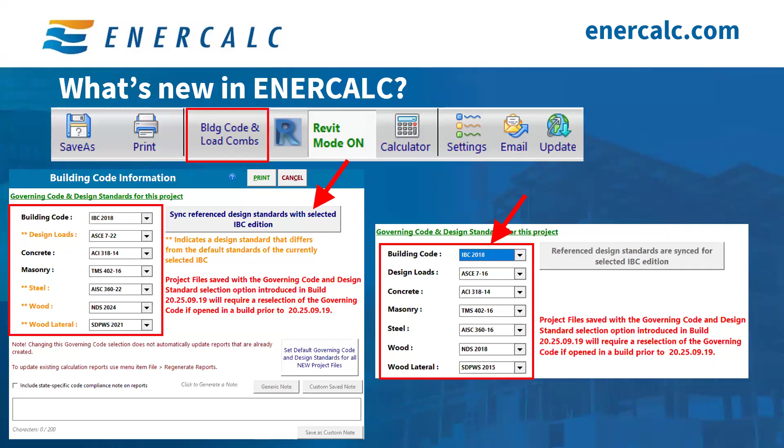When you click on it, it'll change all of these other ones back to whatever that particular IBC references. You can notice here that this is highlighted in a different color, a light orange yellowish color. Anything in this highlighted color is not referenced in that design standard, meaning there's a mix and match going on. But if you click on this button to sync everything with the IBC that you're selecting, everything will be shown in black, meaning everything is indeed within what the IBC edition references.

Keep in mind all of the code changes that we just talked about will only apply to the calculations within this ENERCALC file. If you want to apply this code selection, mix and match or not, as a default for all of your future projects, you will need to click on this button right here, which says Set Default Governing Code and Design Standards for all new project files. When you click on this button, you will get this window, and it will show you what the old defaults were and what the new defaults look like. It will also highlight the changes.

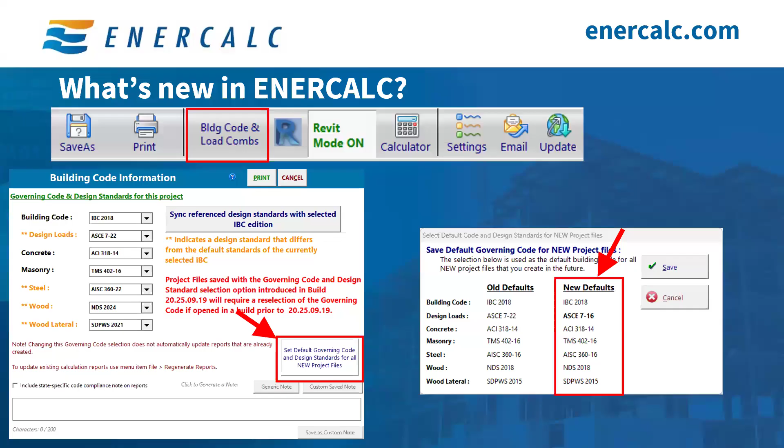So for example, I had ASCE 7-22 here that's out of sync. Everything else is the same standard as referenced in the IBC 2018, for example. And now I just want to switch that from 7-22 to 7-16. So it says, hey, this is your old stuff, this is your new stuff, is this what you want? And of course, you say save, and this will now be the default code selection for all of your future projects.

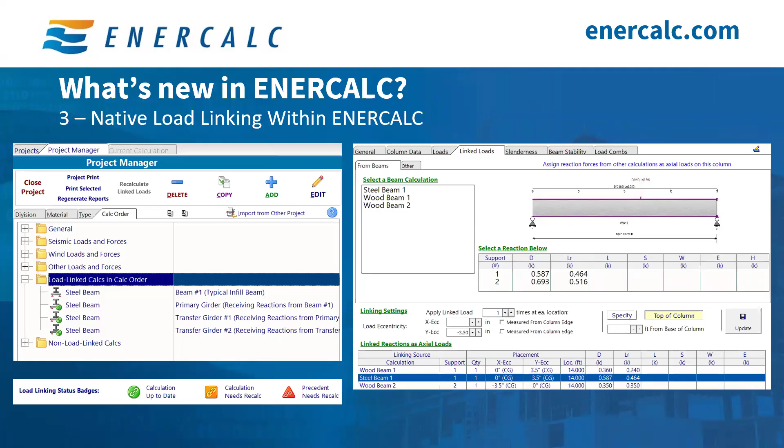Before I get into that, for anyone who'd like to learn more about load linking, we created a playlist of short videos on YouTube to walk you through how to use it step by step, so you can start leveraging this tool in your daily workflow. We also added a new video to the YouTube load linking playlist a few months ago with a full practical example of how to use load linking in real-life design, transferring reactions from beams to columns. This example covers wood beams, wood columns, steel beams, steel columns, and the interchange between them—for example, going from a wood beam to a steel column, or a steel beam to a wood column, and so forth.

Overall, load linking is a powerful tool that allows engineers to create a well-connected chain of calculations while minimizing the risk of transcription errors.

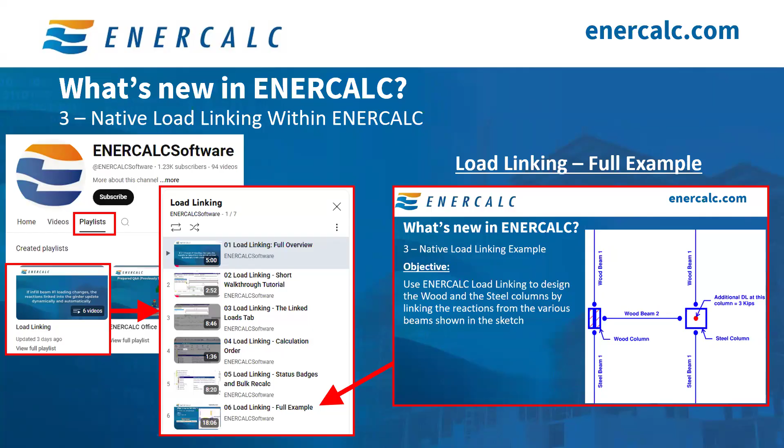Now, with today's new release, fresh from this morning, this new build has load linking that supports the general footing module. You can now link reactions from columns and apply them directly to whatever footing you're designing. This link will transfer axial loads, lateral loads in both directions, as well as moments in both directions seamlessly, so you never have to go through the manual process of transcribing reactions ever again. That's just a quick overview of it.

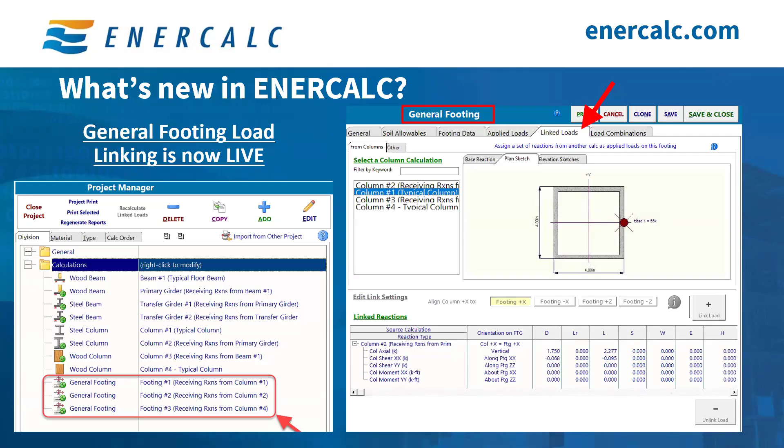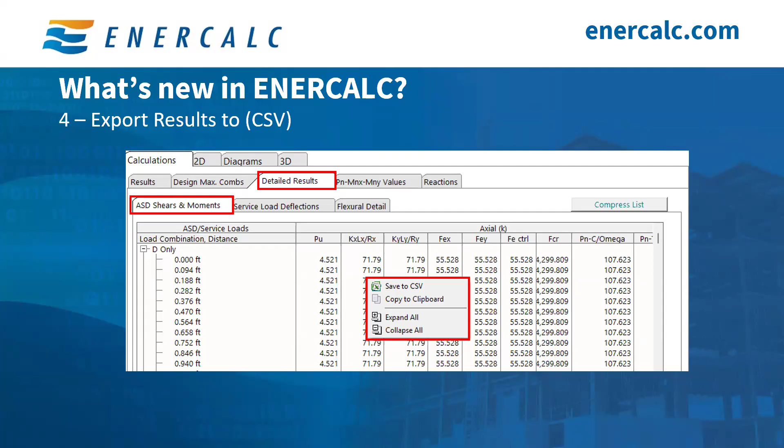By popular demand, we made an important update a few months ago that people are still getting surprised by: the general footing module now supports top reinforcement. Users now have the option to specify top reinforcement in the footing for cases where the footing experiences tension at the top rather than the typical case of tension at the bottom. You can specify the rebar size and quantity separately for each direction.

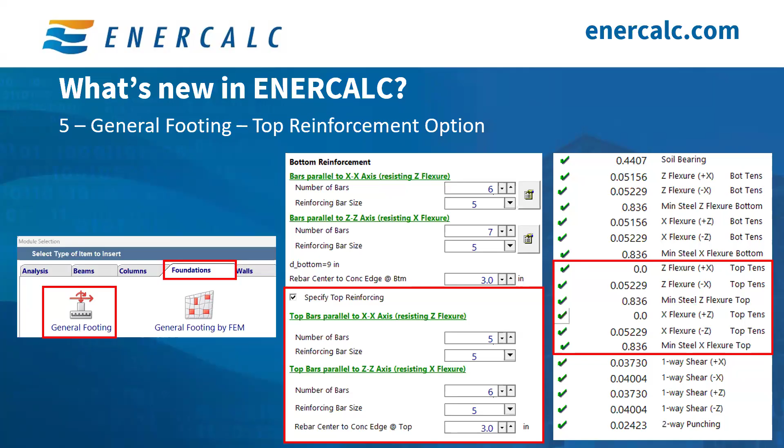Our next update is the ACI 318-25. We recently added full support and incorporation of the ACI 318-25 in our modules. A few jurisdictions, starting with Georgia, are set to adopt the ACI 318-25 this month, in January. We're seeing this happen more often now, where a jurisdiction adopts a certain IBC edition and then leaps forward to grab a newer edition of a certain design standard. That's exactly what's happening in Georgia, and that's also been happening with certain jurisdictions with the ASCE 7, where they forward adopt that standard specifically. In Georgia, it looks like they're adopting the ACI 318-25 ahead of the IBC cycle.

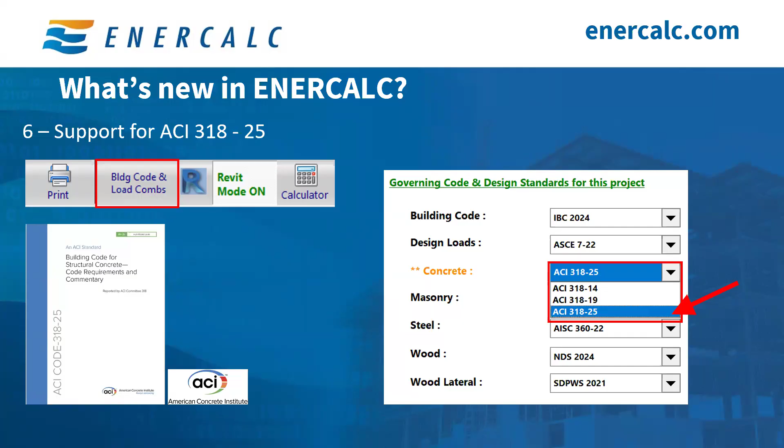Now this is fully incorporated, and if you click on the building code and load combinations, you can hand pick the ACI 318 edition you want to use for your project. Implementing ACI 318-25 in ENERCALC gives our users the flexibility they need to keep their drawings and calculations compliant with the authority having jurisdiction over their projects.

The last update we have is the subscribe to release notes feature, which is pretty useful. I personally use it to see what's new in each new edition or build that gets released. With every new update to ENERCALC, we send out release notes outlining what changed, what got updated, and what got fixed. This gives you a quick idea of the top changes so you can take advantage of new features and know which bugs got fixed. We do this once a month whenever we release an update. You can subscribe to receiving these release notes by clicking the update button and then clicking subscribe to new build email updates, and you'll be good to go.

So with that being said, we are ready to dive deeper into the meat of the presentation today. The focus of the presentation is the steel beam module. We use this module to design steel beams, steel outriggers, girders.

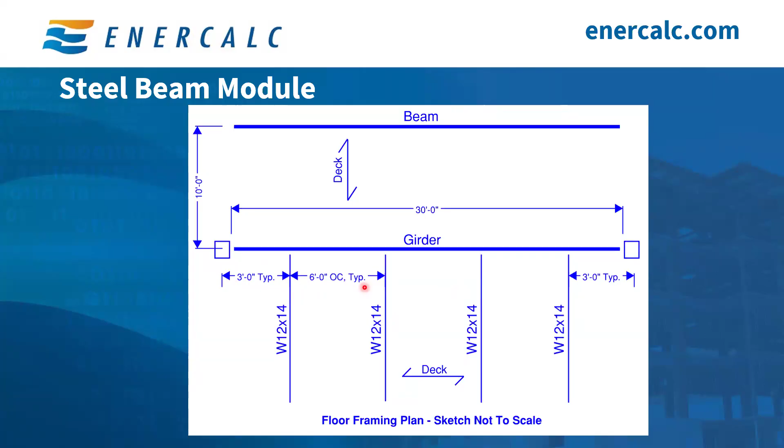Now that you have an idea of what we're trying to design, let's get to it. We follow the same familiar process we always do. We start by clicking on the Add button, then click on the beam tab, and select steel beam to start a steel beam calculation.

Typically, we work our way from left to right throughout all these tabs until we're done with all the input tabs. Starting with the general tab, we'll give our calculation a name. I'm going to call it steel girder. I always suggest people working on active projects give it a much more meaningful name.

Not just steel girder, because the building is going to have a bunch of them. So always try to have some sort of system so you can name your calculations a lot easier for other people. But anyway, we're just going to call this steel girder.

I personally do most of my design in ASD, so that's what I'm going to be using. But ENERCALC supports the LRFD design method, so if that's your preferred design method, you can just click LRFD here.

Next, we need to input some material design values. We will be designing a wide flange girder, so we will use FY 50 KSI, and of course modulus of elasticity for steel is 29,000 KSI.

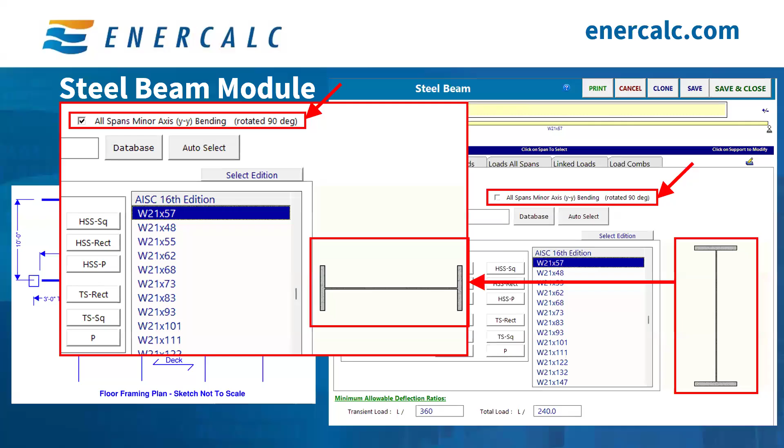And hopefully this is a good visual reference for everyone working on this to say, hey, this is happening. And it also changes the 3D representation of this beam. So again, it shows it sideways, in its weak direction, rotated, just for proper visual depiction. So whatever you're doing in the input tab, it's actually being represented properly in the 2D and the 3D sketches to help tie everything together.

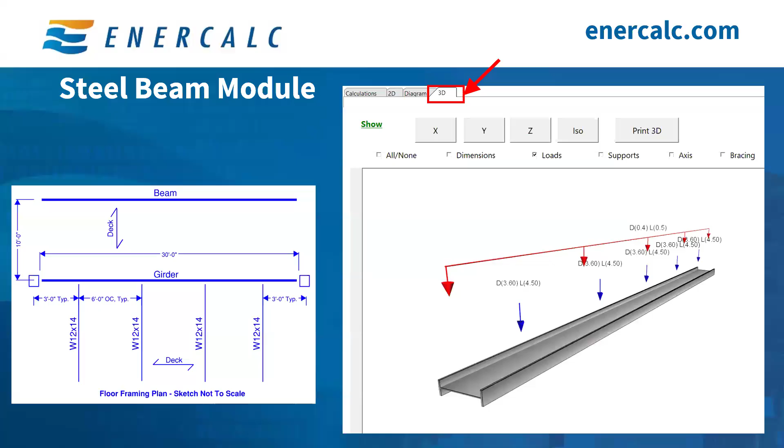However, we will not be checking this option since our girder is loaded in its primary strong axis, but it's just good to know that this option exists. So next we pick the beam section that we want to check. If you want a square HSS or HSS rectangle or pipe or whatever you're trying to use here; for us, we're just using a wide flange beam. So we pick W here, and this table will auto-populate with all of the AISC section sizes that we're accustomed to.

And you can actually click on this button that says Select Edition. You can go and get a different older edition for the sizes, not necessarily for the design checks. The design checks are performed based on the loading combination and the design standard that you set for the whole ENERCALC file, as we talked about at the beginning of our session today. So that one is for the design, and this one right here is just for those sections.

If you are looking maybe for an older AISC, maybe from the 14th edition, or maybe a historic section or something like that, you can grab it from there. For us, we're just going to continue using the AISC 16th edition. And for this example, I'm using a W21x57.

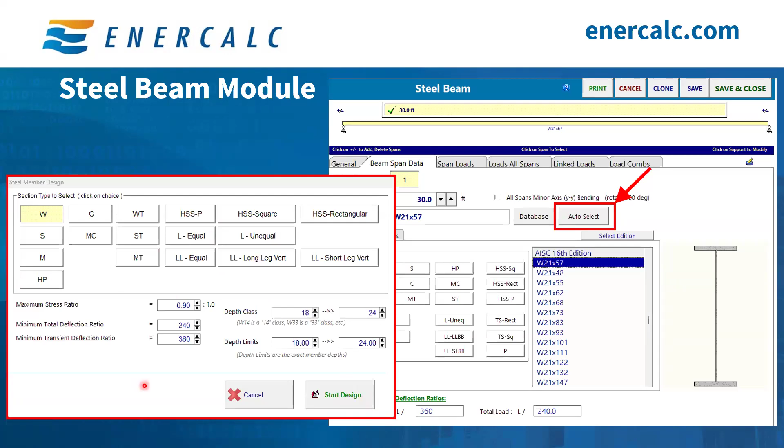So this is a good thing here, especially if you have very specific and restrictive requirements that restrict your depth. So anyways, once you're done with identifying all of this, you click on Start Design, and you will get this window. And this has all the results for you to evaluate. So I'm sorting everything by weight, but you can sort it by bending ratio, total deflection, depth, whatever you really want to sort it by. But we're just going to go by the weight for this example.

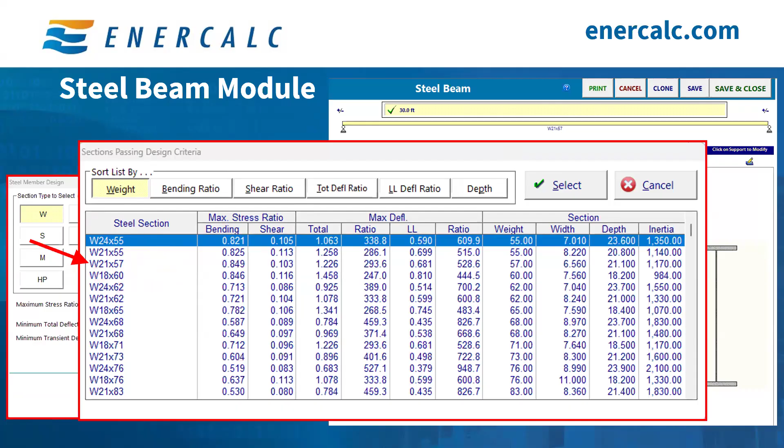And based on this, I could have used a W24x55. The bending ratio is fine. All of this is fine. And the same thing for a W21x55. So doing this kind of helps open your eyes just slightly to see what's going on. But for our example, I'm going to continue using the W21x57.

The last item under this tab is setting the deflection limits. So all the way down here, you can see the maximum or the minimum allowable deflection ratios. So again, for transient load, I'm still sticking to L/360 and total load L/240, which is pretty typical, but you can do whatever works for your specific project.

Next, we move on to the span loads tab. Under this tab, I want to apply the load on the girder. We're going to start with this side right here where we have the slab or the deck. So this deck exerts a uniformly distributed load on the girder. So you add a load, you click on uniformly distributed.

I always encourage everyone to have a little description of the load source, so you know just where the load is coming from. So I'm going to call it here typical area load, one side, and we have 80 psf, and we have here 100 psf for floor live. And then we want to check this option, use trib width. So now we can say the trib width is 5 feet. This is where you input it right here. And again, the 5 feet come from right there. So now we already added this load, and this is good to go.

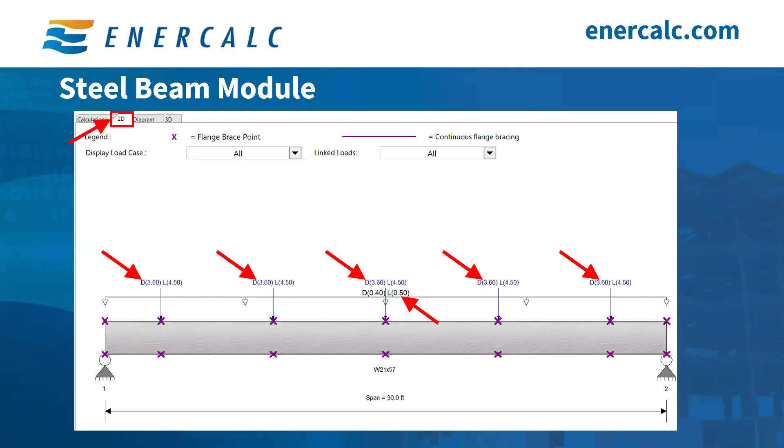So lastly, of course, you go to the load combinations. This is a very common tab that we have in most of our modules. You can select whatever combination you want to run. You can have your own combinations. For me, I'm just using the standard ASCE 7-22 combinations.

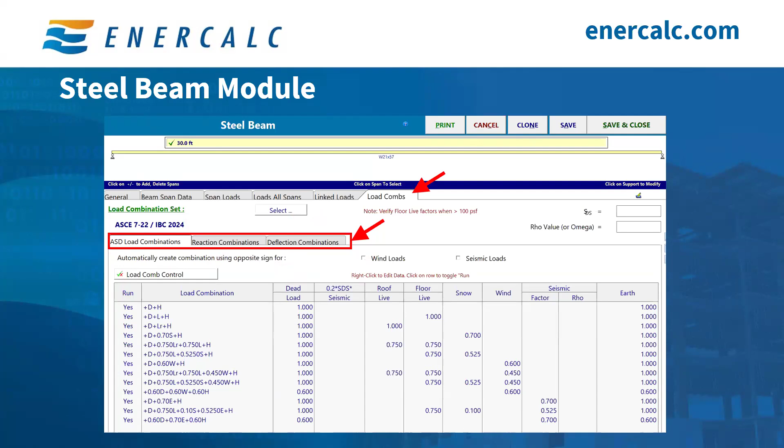And of course, ENERCALC allows you to control the strength combinations by themselves, the reaction combinations by themselves, and the deflection combinations by themselves. So this way you can implement your combinations however you want them to be implemented.

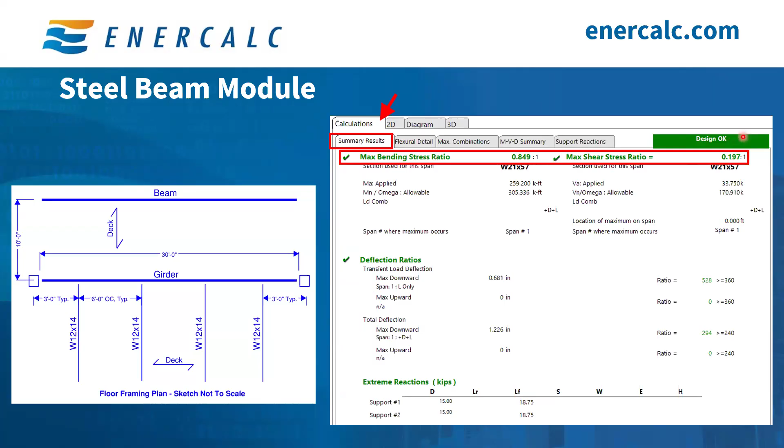Now that we're done with all of the input tabs, we're ready to evaluate the results. Going under the calculations tab, summary results, you can see here the maximum ratios. That's bending stress ratio of 0.849 and maximum shear stress ratio of 0.197. And, of course, the design says, okay, so this beam is good to go, your W21x57.

If you need more information, you can go down here a little bit and you can find what your applied moment is, what your allowable moment is, and what load combination controls that. And the same thing right here for shear, for example, and you can even get the location of maximum shear.

Next is the deflection ratios, the transient load deflection. You will get that as an absolute value, which is in this case 0.68 inches, and of course you get it as a ratio, which right now meets L over 528. 528 is equal to or larger than 360, so you're good to go. Same thing here for total deflection. And of course, the last piece of this page is the extreme reaction. So for support one, your extreme reaction dead is 15, and your floor live load is 18.75.

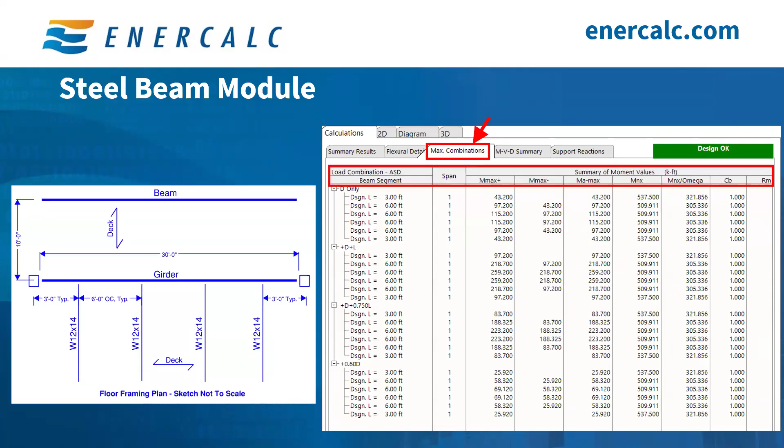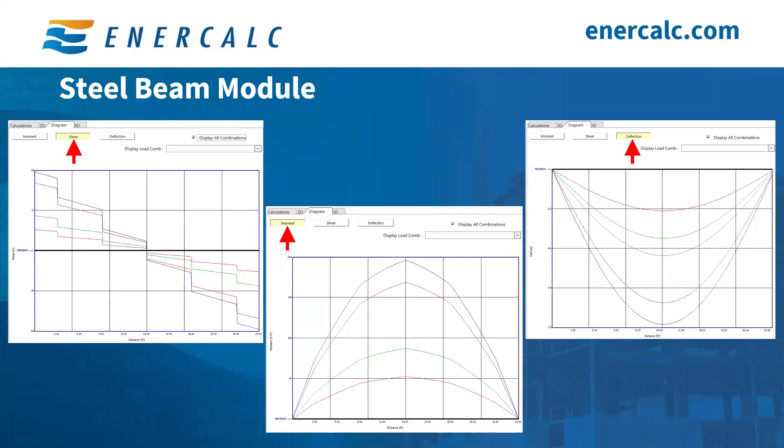And then under the diagram tab, of course, you will find the shear diagram, the moment diagram, and deflection diagram for those visual engineers who like to make sure everything looks orderly. And then this pretty much wraps up your overall design of that girder.

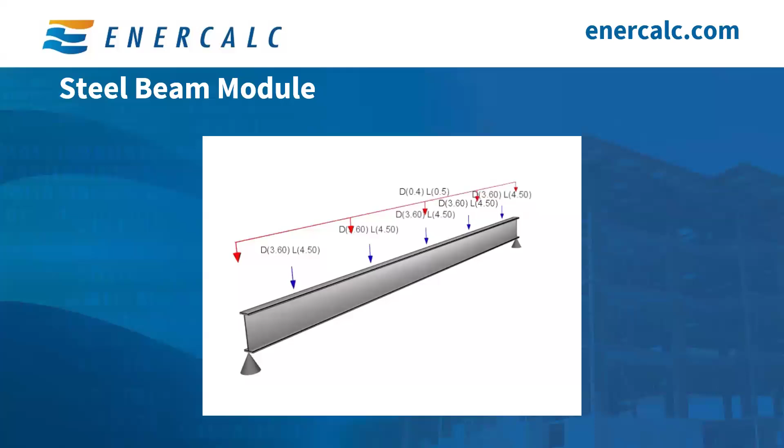So overall, the steel beam module is a very useful and popular module among our users. Coupling this module with load linking capabilities, you get a robust workflow that changes dynamically as you make future changes and revisions. Especially now that you can see where you got the load from the beam to the girder, and you can grab that reaction from the girder to the column. And with today's release of general footing incorporation into load linking, you can finally take that load from the column to the general footing, and you don't have to write any reaction down or do anything manually.

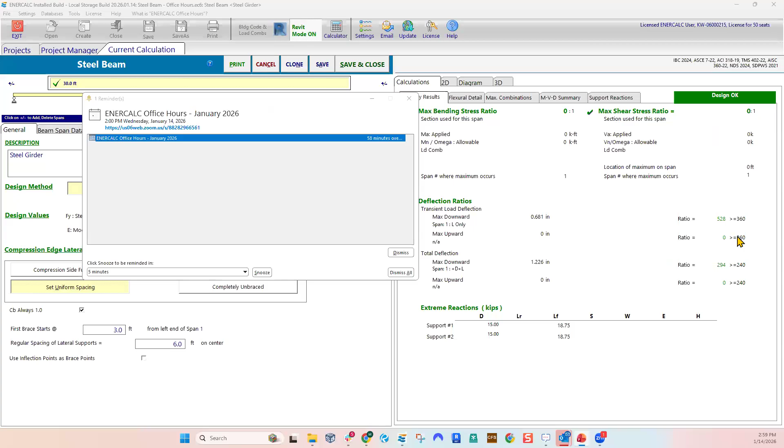So this is a frequently asked question, so frequently, in fact, that there's actually an FAQ style page about this on our website. So ENERCALC now only includes IBC and ASCE as its primary code references. So at this time, we don't have any plans to specifically branch out into local adoptions or local amendments like the CBC, Florida Building Code, Connecticut Building Code, and so on. There's several reasons for that.

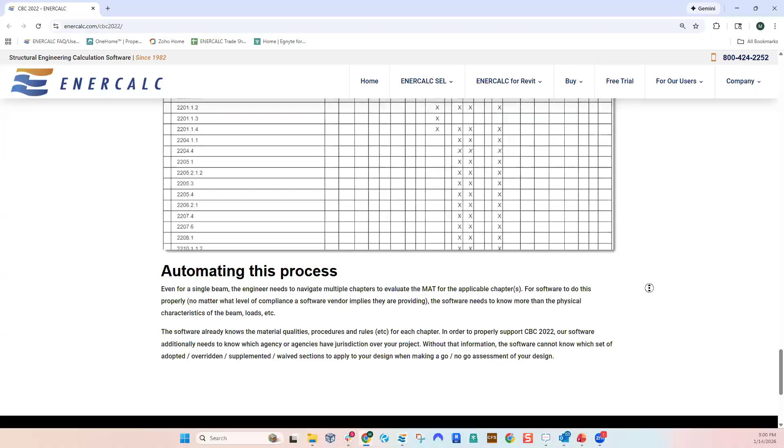One of the main reasons is that we now have the a la carte design standard selections, which Mac went over, where you can make your own collection of different ASCE, AISC, ACI code selections. So you have that capability. You also have the ability, if you need a calculation report to say California Building Code, or I'm the engineer of record, I say this meets California Building Code, we have what Mac is showing you on screen right now,

which is the state-specific note feature where you can go create a note of whatever you need to say to the attention of a plan reviewer, authority having jurisdiction, what have you, and decorate all of your calculation reports with that note. So you can say, hey, this has been checked by the engineer of record in accordance with CBC 2022, 2024, what have you. So there's several different features we have specifically to support our users who work in different jurisdictions with different approaches to adoption.

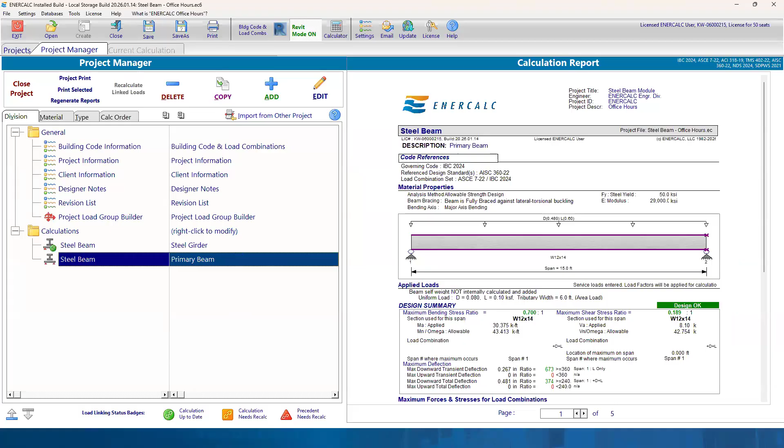Mac, can you go back to your example if you have that pulled up? We just want to clarify what's meant by support 1 and support 2 in a load linking context. Ronald, hopefully we can cover your question here, but the way every ENERCALC module works, your supports are always numbered from left to right. So even in the case of a left-hand cantilever, the free end would be designated node 1 or support 1, and it wouldn't have any reaction force. Then you'd have 2, then 3. So you're always going to see those numbers start from left and number from left to right.

And I want to add to this that if you have a beam right here and your loading is different - so right now the loading is exactly the same on each end, but if you have a beam that's loaded differently, that's why, in my opinion, this sketch is really useful because you get to see what the sketch looks like. It specifically labels the support you're looking at: this is support 1 or this is support 2 or support 5, whatever it is, and you get to pick whichever you see on the sketch. You say if you want this one, then that one is 2. If you want this one, then that one is support 1. I hope this makes sense. But the best thing about this is that you should always check this 2D sketch and see which end is labeled what, so you can grab the proper reaction that corresponds to that support you're looking at.

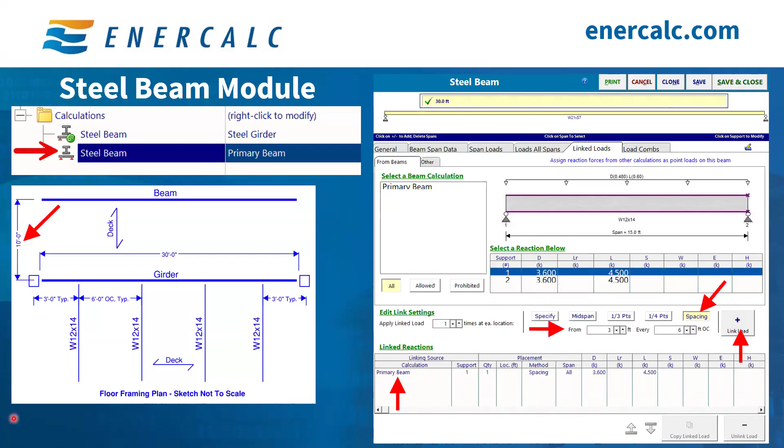Perfect, okay, next question: can the steel beam module be updated to include calculation for camber? So I want to say that we've answered questions about camber in the past. There is certain information available in the steel beam module that you can use to address camber type design concerns, because the deflection results, as Mac can show you if he still has that calculation pulled up, give you granular outputs by different cases and combinations. So you can see, for example, the dead load only deflection, and use that to help inform your design decisions. There's not explicitly any features built into the ENERCALC module that include design for camber per se. So if you're wanting to see additional features on that, absolutely go ahead and reach out to the support team, support@enercalc.com, with the details of that feature request, if there's something you'd like to see different that would explicitly help assist you with your camber design process.

But as Mac is showing you here - go ahead, Mac - you can see some detailed deflection results that relate to dead only effects. You get full granular results in terms of deflection. So you go from the MVD summary, then to the deflections tab, and then click on which one you're interested in.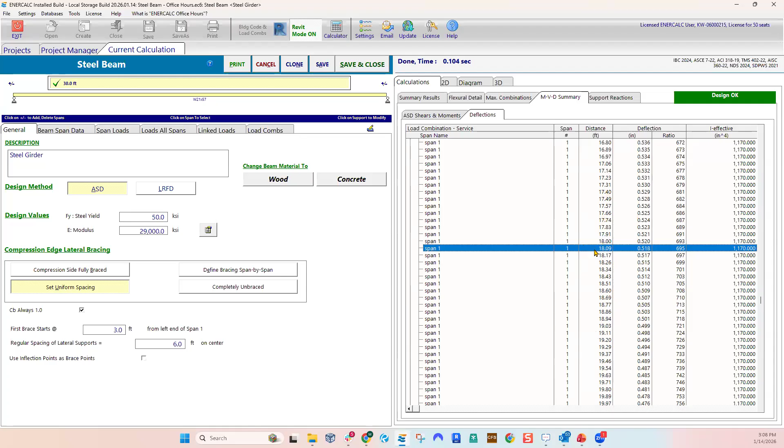So for example, just dead only, and you open this, and now you'll see it along the length of the beam. So our beam is 30 feet. You can see the incremental deflection as a number and as a ratio, as it goes through. By the time you get to the middle of it, where you're expecting to see that maximum deflection, you can go through and get all of this information. This should be all you need to take it a step further.

And if you want to see a visual presentation of that, you can also go to your diagram tab where you can filter by individual combinations. If you uncheck display all, then you'll see one combination. This is one of the deep cuts we like to draw attention to: the slider capability. Not everybody knows that if you go to a single combination or case display, you also have that slider to get a specific visual depiction at a certain location. That's a handy alternate way of seeing your results other than the tabular view Mac just showed you. Hopefully that helps, but if you do have more detailed feature requests, absolutely fire those over to us. Don't hesitate.

Next question: Can I design multi-span with different beam sections in one design? In fact, we answered a similar question last month related to wood beams. Can I design multi-span with different beam sections in one design? ENERCALC always assigns the same section for all spans.

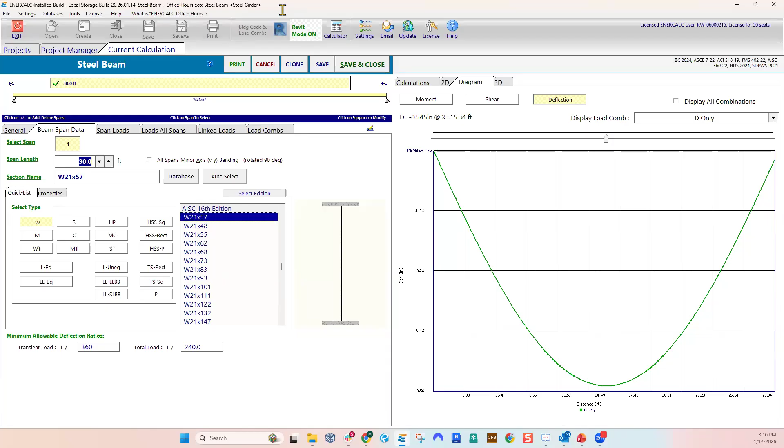The one word answer is yes, you absolutely can. You have the capability, and I'm forgetting exactly where. I know for wood beams we can. Let me check here for steel, because I keep forgetting which one you can and one you can't. Give me one second. Beam size property, directly above the 2D sketch: use for current span versus use for all spans, next to your auto select button. There you go. Yeah, you have to have multiple spans for that option to show up.

And the answer is yes. As soon as you add additional spans where you have more than one span on your beam, you'll see those options appear right where Mac was just pointing. You'll have the option to toggle that section size on your beam span data tab from use for all spans to use for current span. You can jump back and forth, and that way you can designate a different section size span by span. It's the same thing for the wood beam. I know last time I froze, but once you add another span, you get this additional option that says yes, you can separate them by span or use them for all spans.

Next question. Will any modules on aluminum elements be developed in the future? I think I can say pretty confidently we don't have any active plans or active projects right now to implement aluminum design, but we definitely track those things. If that's important to your team, absolutely fire that over to us. That's how those things climb the leaderboard. Don't hesitate, send those over. The whole engineering team sees them, Mark our CEO sees them, the development team sees them, and that's how we decide what customers need, by what you guys tell us. So don't hold back on those. I do still see a couple hands raised, so if you have questions we haven't covered, feel free to drop follow-up questions.

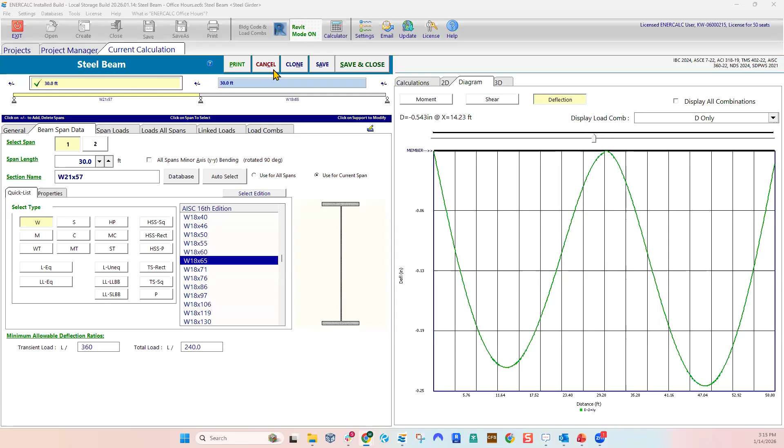Next question. Will we be able to analyze axial tension in members in the column module? I'm not aware of most of our modules allowing net tension right now, I haven't tested that in a minute. I know for a fact in the concrete column module we do stop you short if you have net tension in a column. I haven't tested that in a minute on the steel column module, but I believe most of our column modules are not set up for net tension. They're primarily designed for compression.

Go ahead Mac, if you have something about that. No, I think that's right. I was going to check it out, but yeah, I think it's the same thing even for footings - net tension is just not supported. Again, if that's something that needs to be a feature request, where you say we have a use case where we see this all the time and we'd like to see this, definitely reach out. I can't tell you for sure if it does or doesn't on the steel off the top of my head, I'd have to test it, but I know for sure the concrete column stops you short.

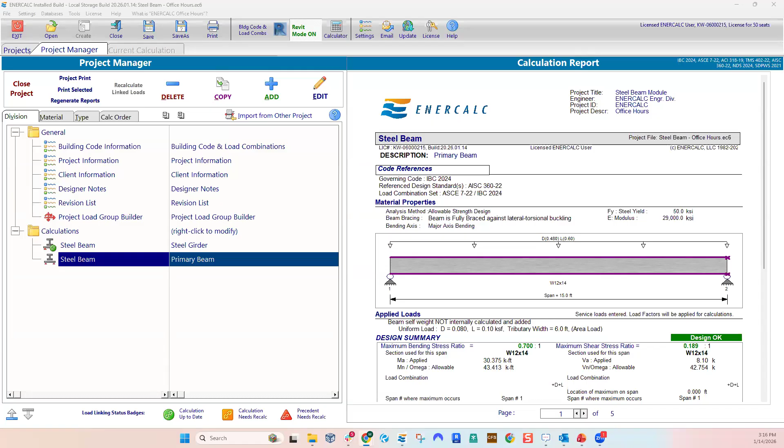Question from Jesse Burke. Shout out to South Carolina. South Carolina's in the building. All right, good question Jesse.

A lot of engineers do use the beam analysis module to... I don't think he read the question, Seth. What's that? I don't think you read the question. Sorry - any plans to add a module for steel bar joist design?

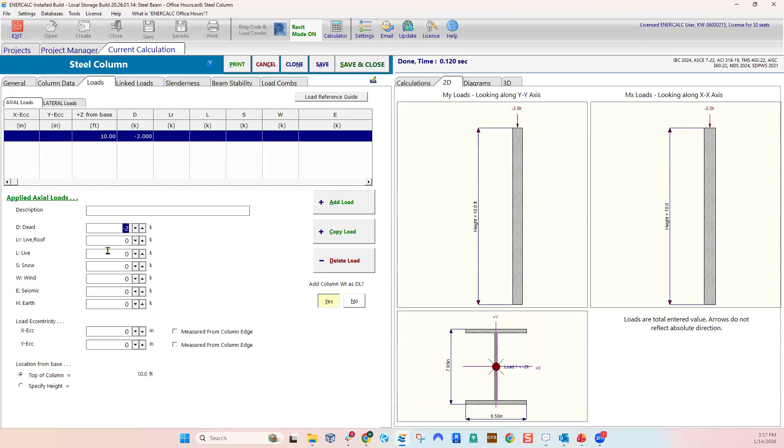A lot of engineers do use the general beam analysis module to assist with bar joist design. In the future, most likely we'll be trying to add load linking integration from the beam analysis module to our other beam modules, column modules, so that'll add a lot of flexibility. But if you're doing a joist where you need actual product selection, we don't have that capability right now. Again, if that's something useful to you guys, feel free to send that as a feature request.

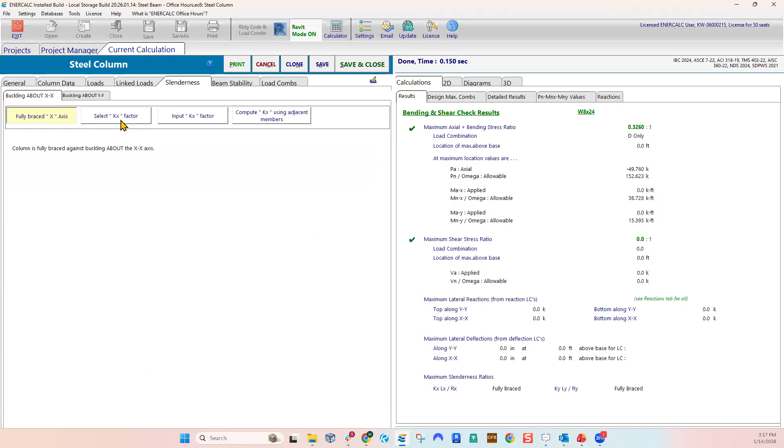Next question. Any plan to use a deep beam or concrete soldier pile system? Good question. So, concrete deep beam is definitely sort of its own can of worms because it's different than your conventional flexural behavior that we do in the reinforced concrete beam module. I don't think we have anything actively going on that, but you can always reach out if you have specific specs or specific tasks you're trying to accomplish.

A lot of times, deep beam turns into strut and tie analysis for some engineers. That's where they'll go, and that's certainly not something that's trivial to package in a module environment, because there's so many assumptions and judgment that goes into strut and tie analysis. But if that's something you're interested in for deep beam, definitely send that over to us in the form of a feature request.

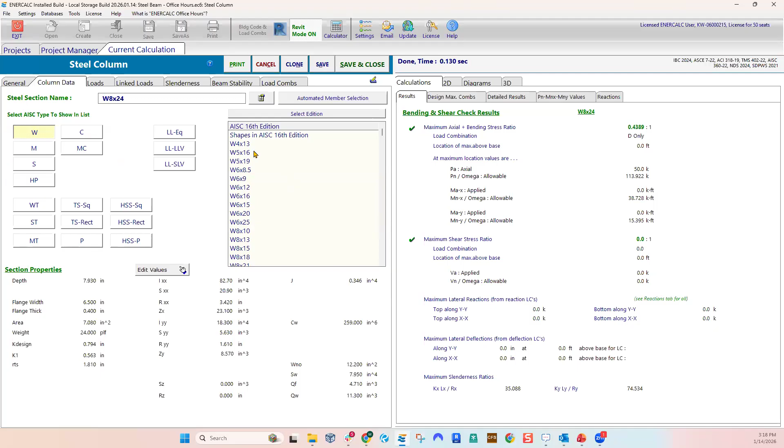And then concrete soldier pile system. I'm not aware of a specific module or development effort that's in the works right now. But again, that would make a good feature request if there's a use case you guys have. You said concrete soldier pile, so I'm assuming the existing soldier pile earth retention capabilities we have don't meet your needs. But if you haven't looked at the existing soldier pile wall module, definitely feel free to check that out and see if that might be a valid capability for you.

And this is kind of a repeat question. Bar joist design module will be included in ENERCALC in the future. Like I said, right now, if you're doing a KCS joist where you need things like maximum shear, maximum moment, deflection with a certain moment of inertia, and reaction forces, you can do all of that with the general beam analysis module. We don't have anything right now that lets you make the leap beyond that into actually picking manufactured products. However, feel free to send that to us if that's something that you guys want to see.

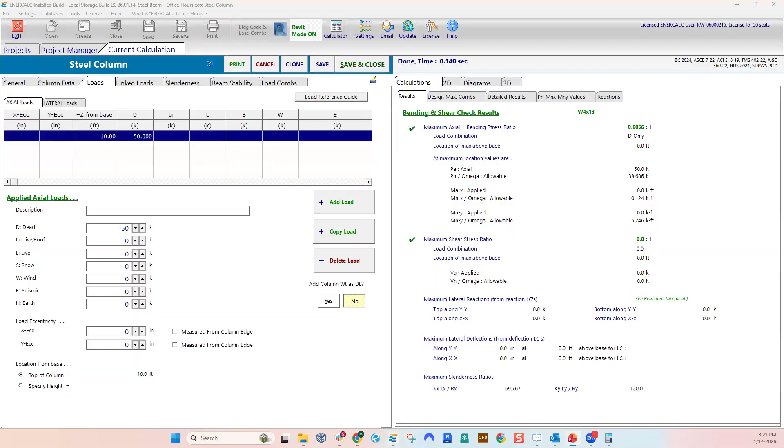Next month's session is going to be on February 11th. We will be covering full path load linking, and that's really taking loads all the way, including all the way into the foundations, that just got released today. Again, thank you very much, and we're looking forward to talking to everybody next month on February 11th.